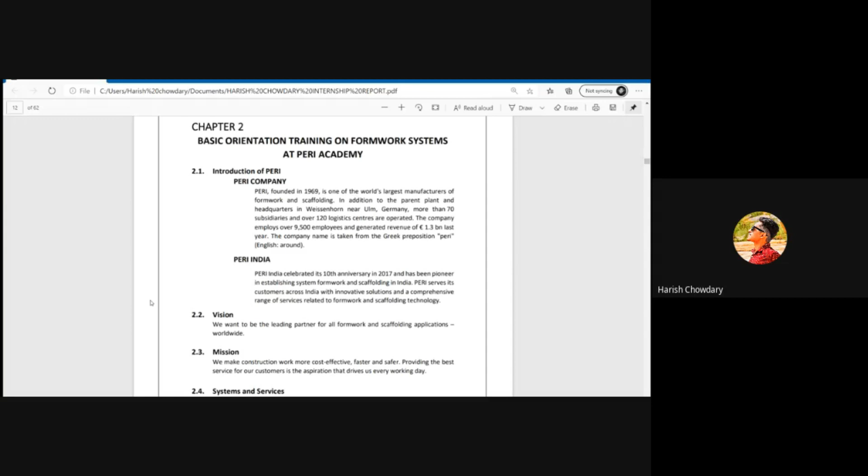Peri India celebrated its 10th anniversary in 2017 and has been pioneer in establishing system formwork and scaffolding in India. Their vision is to be the leading partner for all formwork and scaffolding applications worldwide.

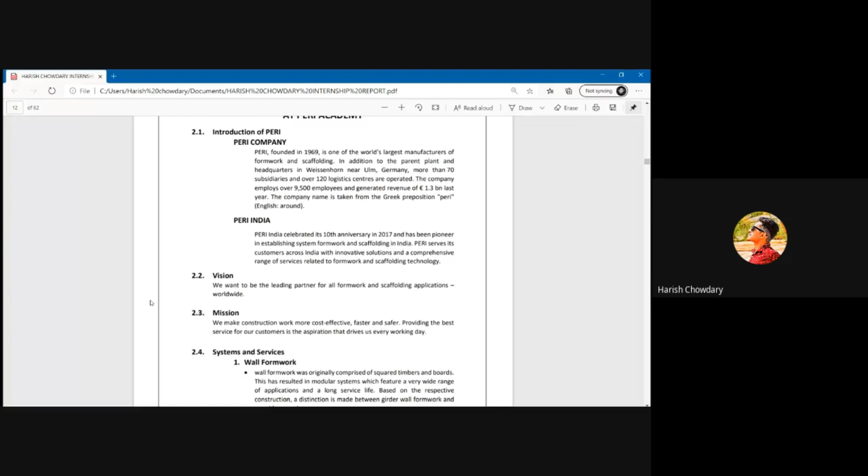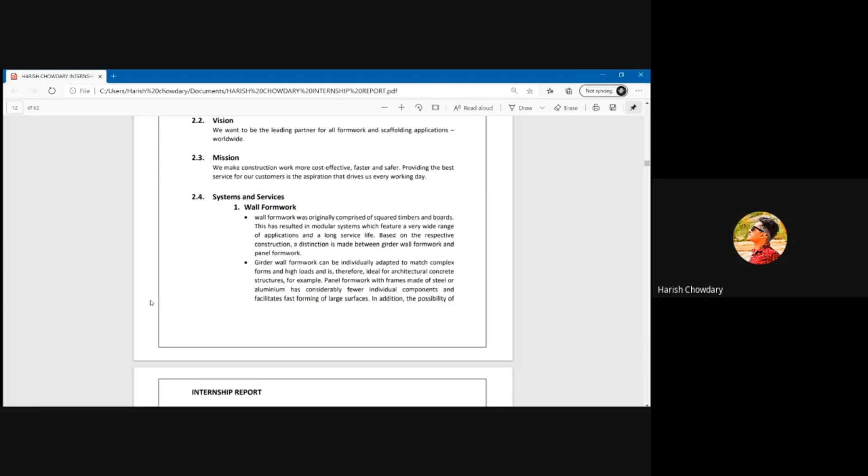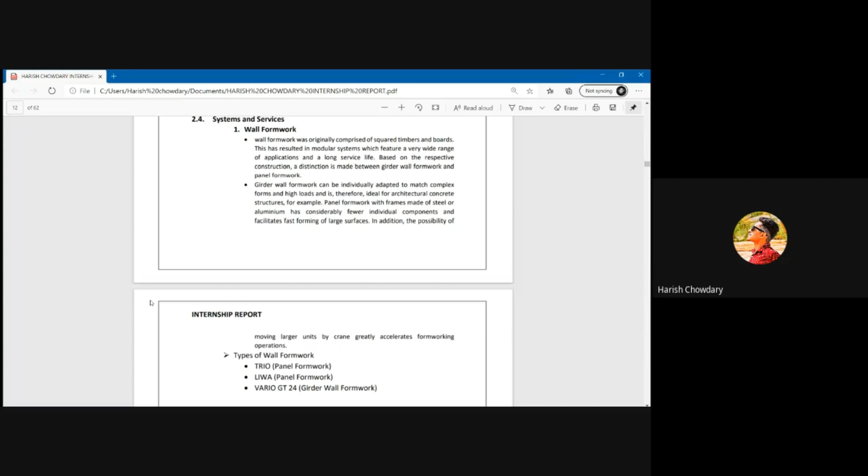Their mission is to make construction work more cost effective, faster and safer. Peri provides systems and services in formwork, scaffoldings, and many services. But in Peri India, they mainly focus on wall formwork and slab formwork.

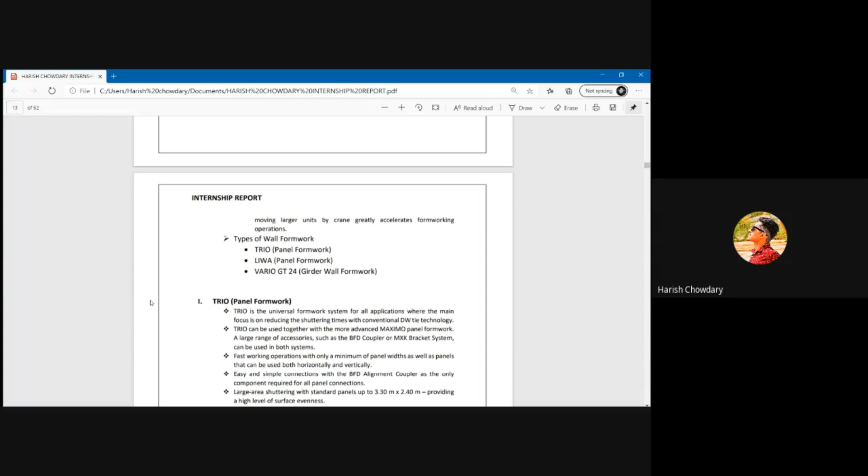In wall formwork, there are three types: Trio, which is a panel formwork; LIWA, which is also a panel formwork; and Vario GT24, which is girder wall formwork.

Firstly, we will talk about Trio panel formwork. Trio is the universal formwork system for all applications where the main focus is on reducing shuttering times with conventional DW tie technology.

The fast working operations with only a minimum of panel width, panels can be used both horizontally and vertically. Trio panel formwork has easy and simple connections with BFD alignment coupler, and can be used for large area shuttering with standard panels up to 3.3 meter by 2.4 meter, providing a high level of surface evenness.

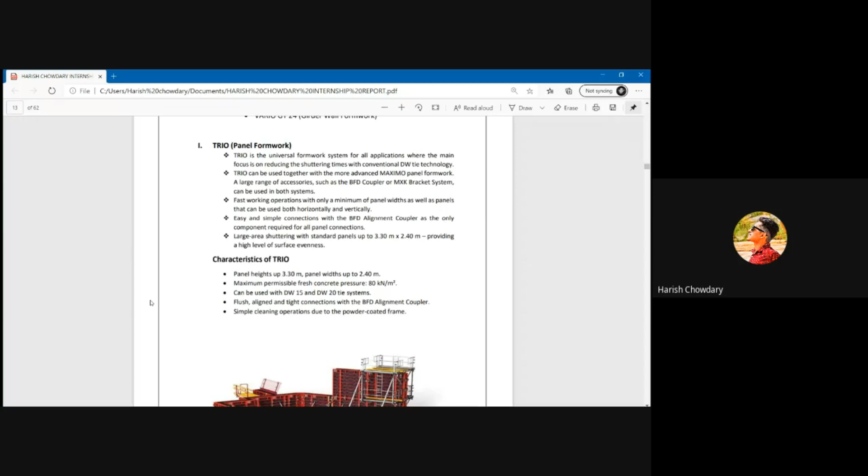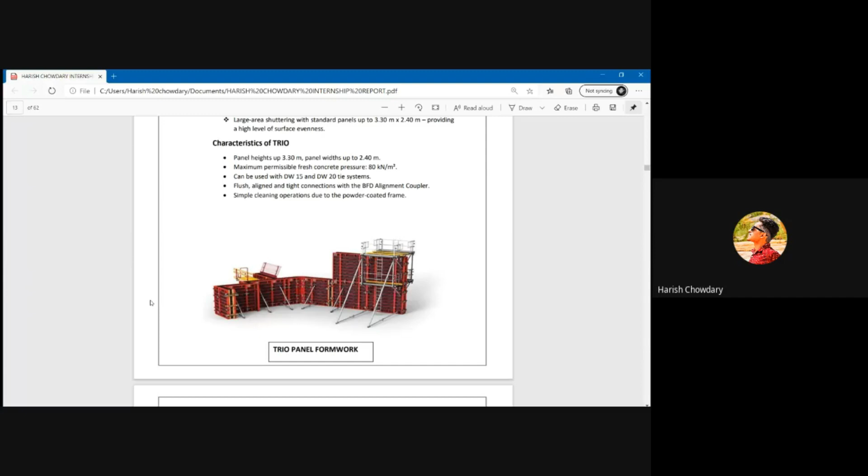Characteristics of Trio are its panel heights up to 3.3 meter and width up to 2.4 meter. It can carry a fresh concrete pressure of up to 80 kilonewton per meter square. They can be used with DW15 and DW20 tie systems.

As you can see, this is a Trio panel formwork which is useful for walls, and it also provides a safe working platform for laborers to pour concrete on standing it.

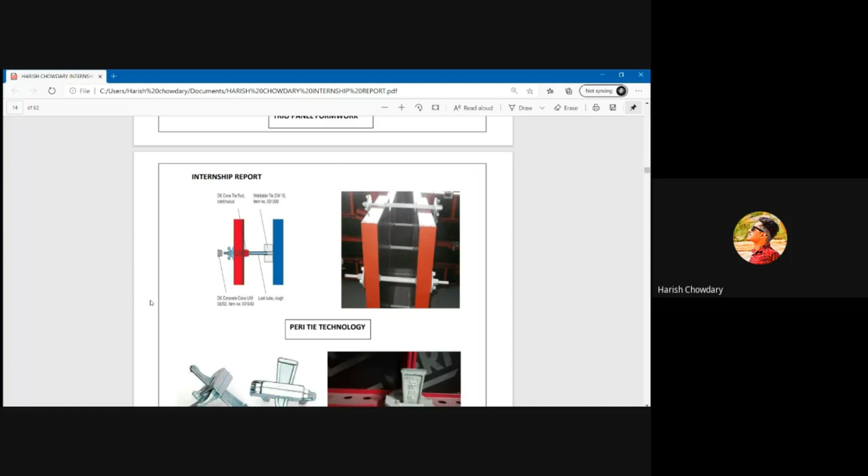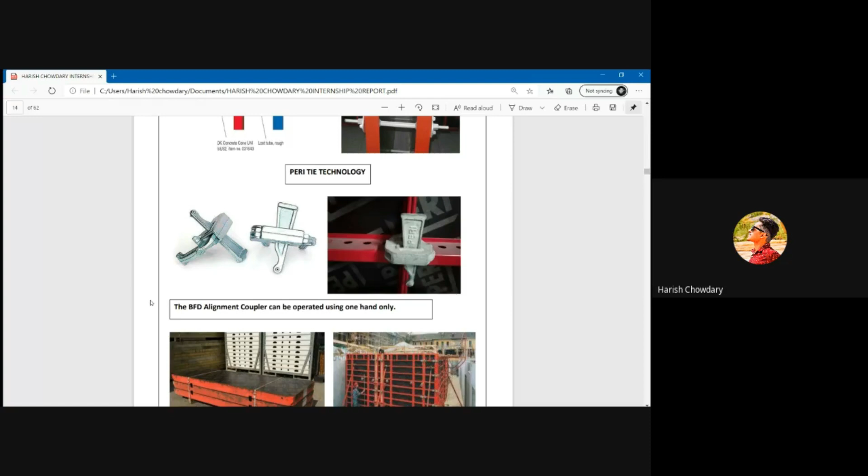This is the Peri-tie technology used to hold the panels tightly for the formwork. This is the BFD alignment coupler, which can be operated using only one hand. These are the panels which vary from size 3.3 meter to 2.4 meter.

The next formwork is LIWA panel formwork. LIWA is the lightest Peri steel panel formwork and deliberately dispenses with more elaborate equipment. This system has very few different frame elements and as every standard panel. It is also a multi-purpose panel which can be used for both columns and wall formworks.

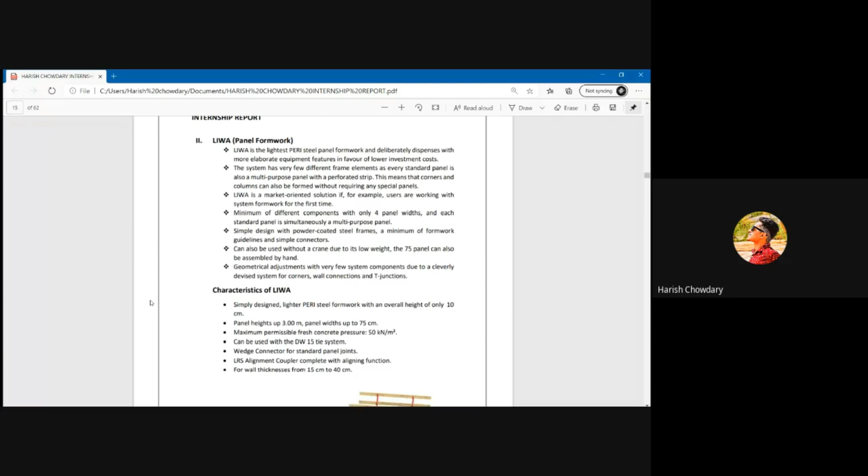LIWA is a market-oriented solution. It can be used with those who don't have any experience using it. Minimum of different components with only 4 panel widths, and each standard panel is simultaneously a multi-purpose panel. Simple design with powder coated steel frames, a minimum of formwork guidelines, and simple connectors.

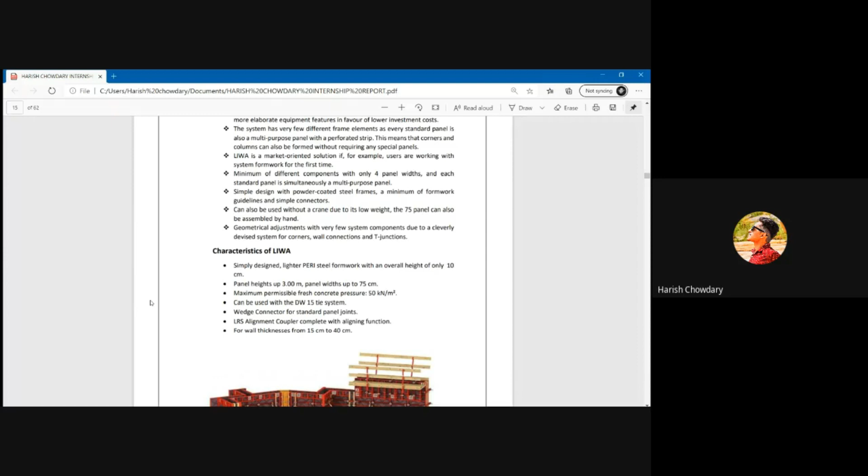Characteristics of LIWA: it is simply designed and a very light formwork with an overall height of only 10 centimeter. Its panel heights are up to 3 meter and width up to 75 centimeter, and it can carry a maximum permissible fresh concrete pressure of 50 kilonewton per meter square. It is also used with a DW 15 tie system.

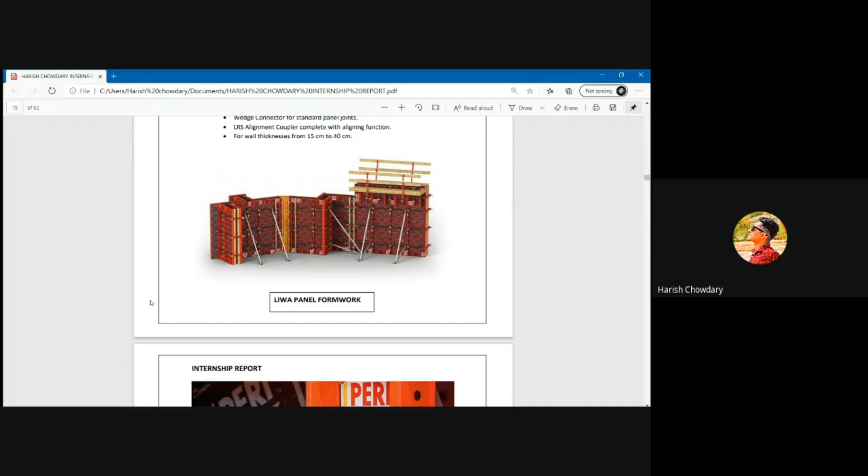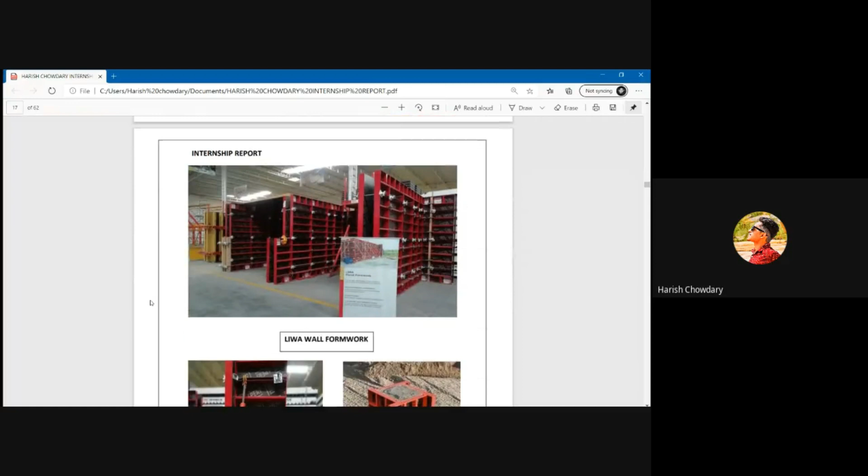As you can see, this is the LIWA panel formwork, a fully operated system with a safe platform for laborers to work. This is the tie technology used in this one. This is a multi-purpose formwork which can also be used for columns and also for walls.

And the third type is Vario GT24. With Vario GT24, the arrangement of individual system components can be freely selected. As a result, the system can be flexibly adapted to accommodate both geometries and requirements.

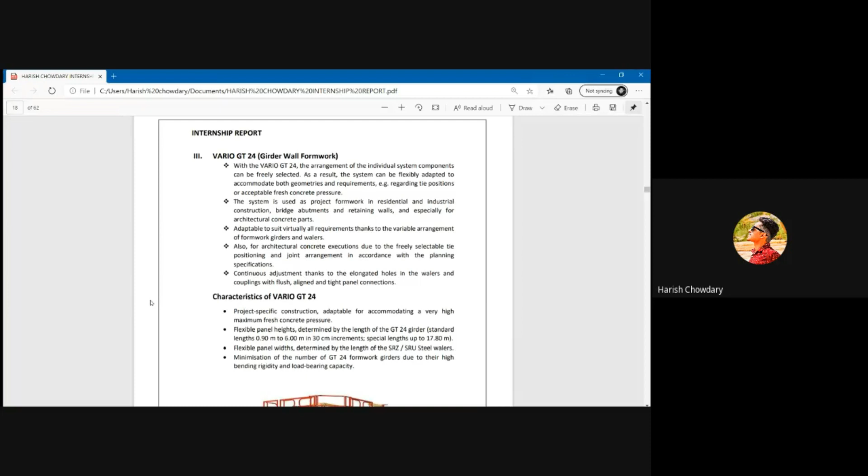The system is used as project formwork in residential and industrial construction, bridge abutments, and retaining walls, and especially for architectural concrete parts. It is adaptable to suit virtually all requirements thanks to variable arrangement of formwork girders and walers, continuous adjustments to the elongated holes in walers, and coupling with flush, aligned, and tight panel connections.

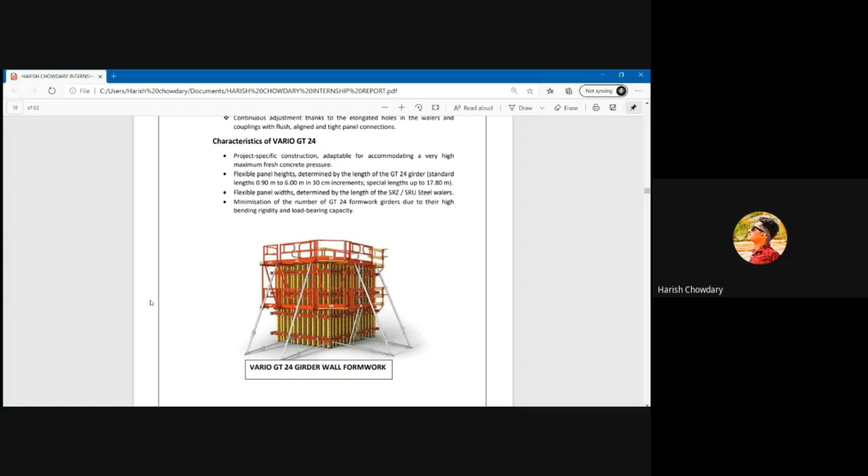Its characteristics are project-specific construction, adaptable for accommodating a very high maximum fresh concrete pressure. It has a flexible panel width determined by length of SRZ or SRU steel walers. Minimization of number of GT24 formwork girders due to their high bending rigidity and load-bearing capacity.

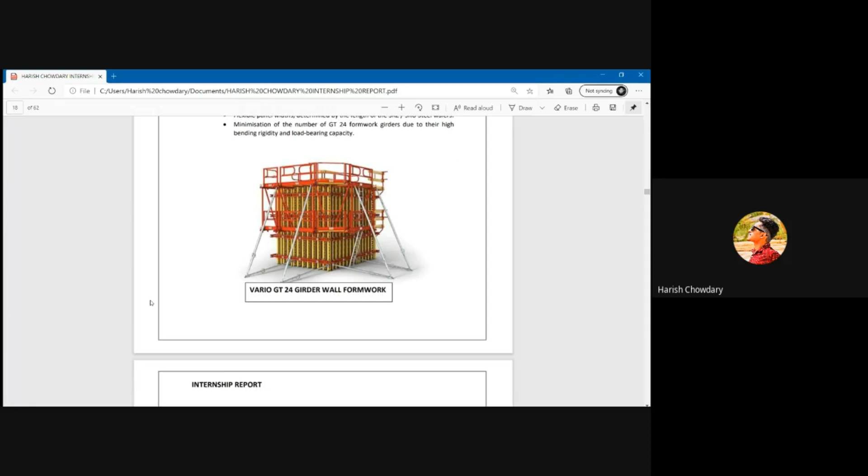This is a Vario GT24 girder wall formwork system. It can be used for curved and inclined walls also.

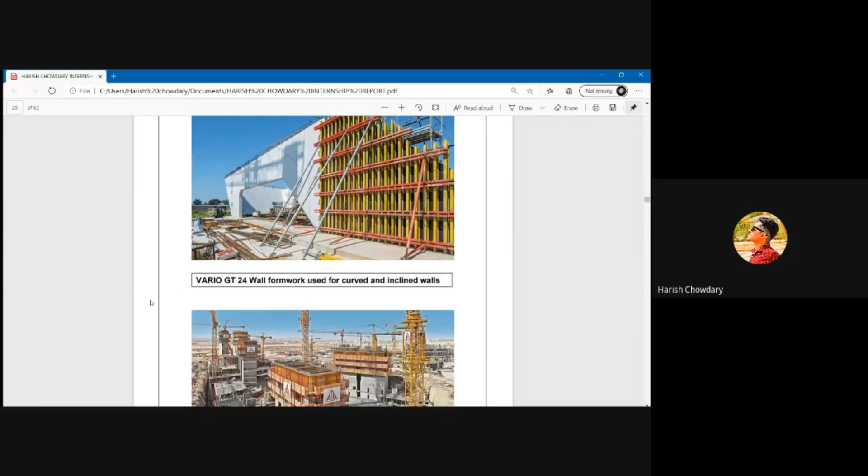And the second service they provide is the slab formwork. The types of slab formwork are Skydeck, panelized slab formwork, Gridflex grid element slab formwork, Multiflex girder slab formwork.

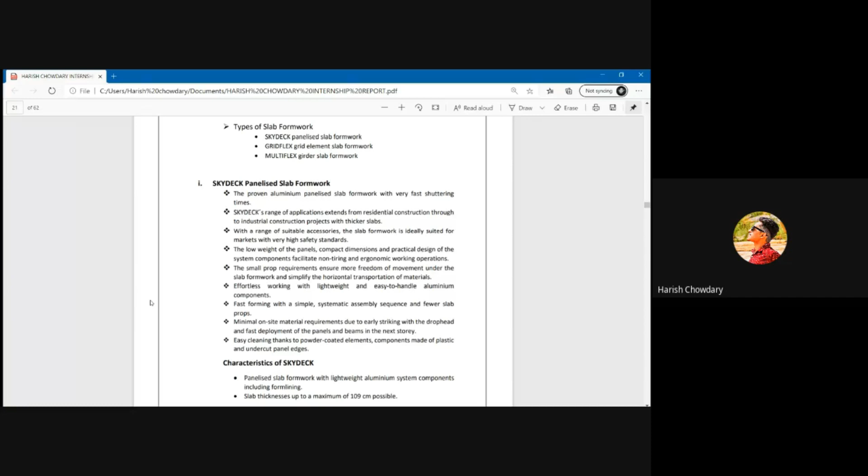Skydeck is the proven aluminum panelized slab formwork with very fast shuttering. The range of applications extends from residential construction to industrial construction. With a range of suitable accessories, the slab formwork is ideally suited for markets with very high safety standards.

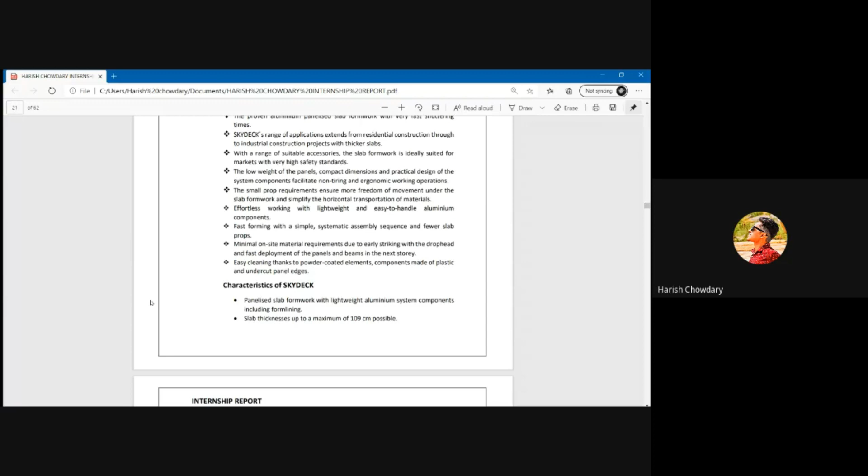The small prop requirements ensure more freedom of movement under the slab formwork and simplify the horizontal transportation of materials. Effortless working with lightweight and easy to handle aluminum components, fast forming with simple systematic assembly sequence and fewer slab props. It is easy cleaning thanks to powder coated components made of plastic and undercut panels. Characteristics of Skydeck.

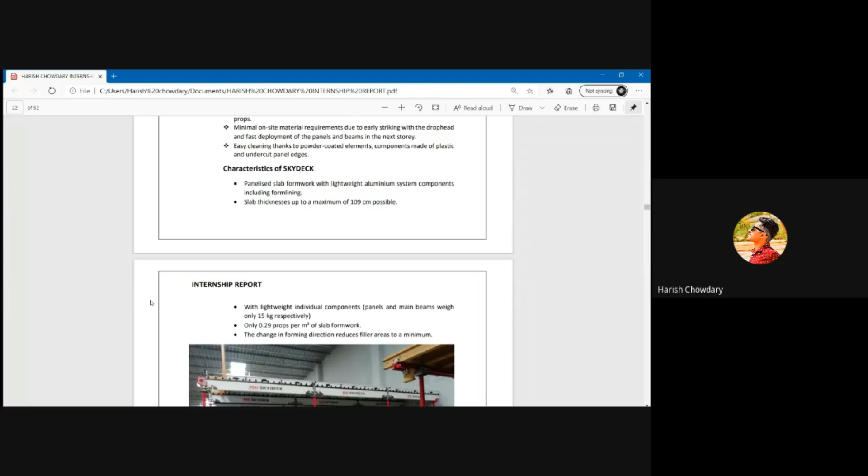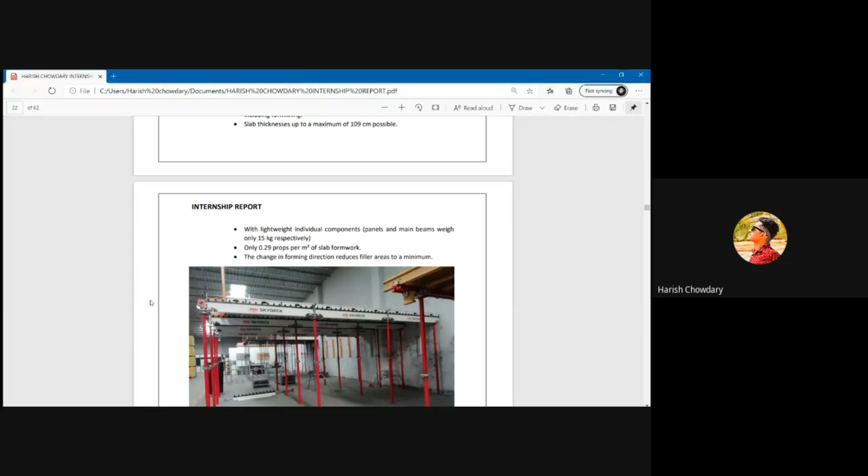The panel is a very lightweight aluminum system component including form lining. The slab thickness can be up to a maximum of 109 centimeters. It is lightweight with individual components - panels and main beams only weigh 15 kg respectively, which can be used manually. Only 0.29 props per meter square of slab formwork.

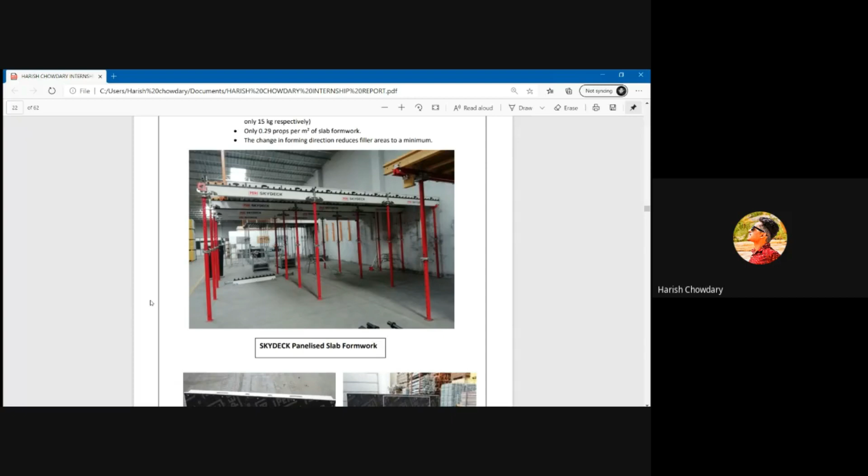The change in forming direction reduces filler areas to a minimum. As it requires only 0.29 props, we can easily access and move any materials under the slab formwork. These are the panels of various sizes.

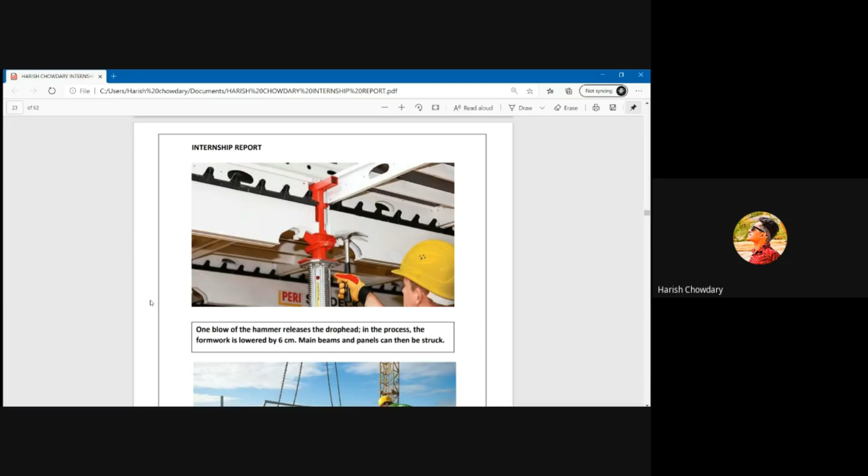It can be used, and in one blow of a hammer it releases the drop head in process. The formwork is lowered by 6 centimeters and main beams and panels can be struck.

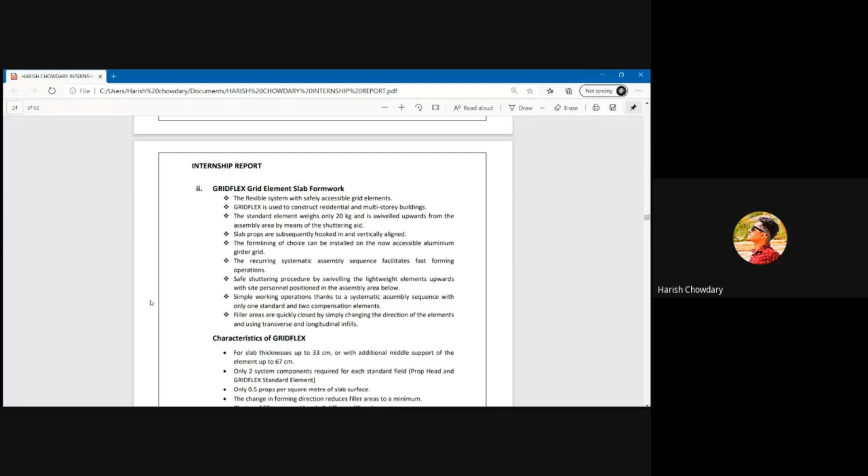The second slab formwork is Gridflex, the flexible system with safely accessible grid elements. Gridflex is used to construct residential and multi-story buildings. Slab props are subsequently hooked in and vertically aligned. The form lining of choice can be installed on the now accessible aluminum girder grid.

It is a safe shuttering procedure by swiveling the lightweight elements upwards with site personnel positioned in the assembly area below. Filler areas are quickly closed by simply changing the direction of the elements and using transverse and longitudinal infills.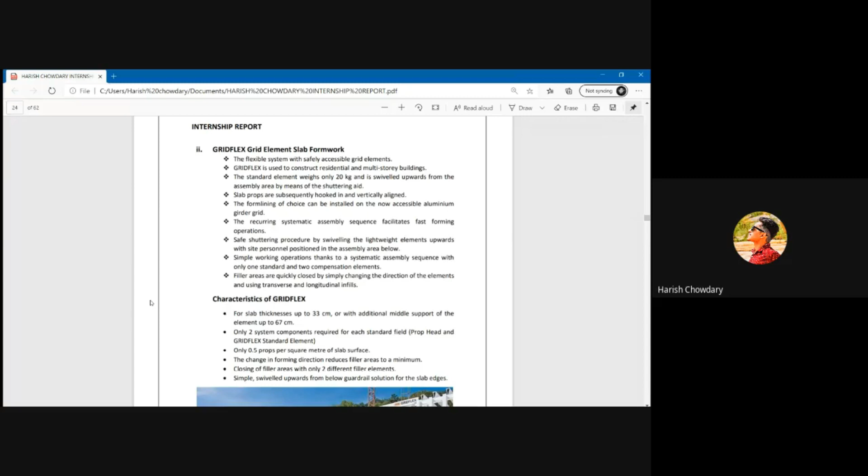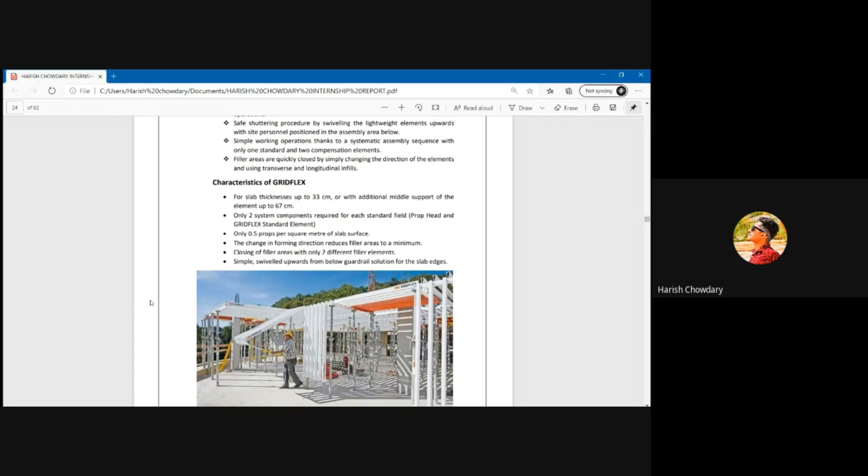Characteristics of Gridflex: slab thickness up to 33 centimeters, or with additional middle support of the element up to 67 centimeters. Only two system components are required for each standard field - prop head and Gridflex standard element. This requires only 0.5 props per square meter of slab surface, which also enables us to move freely below the slab formwork.

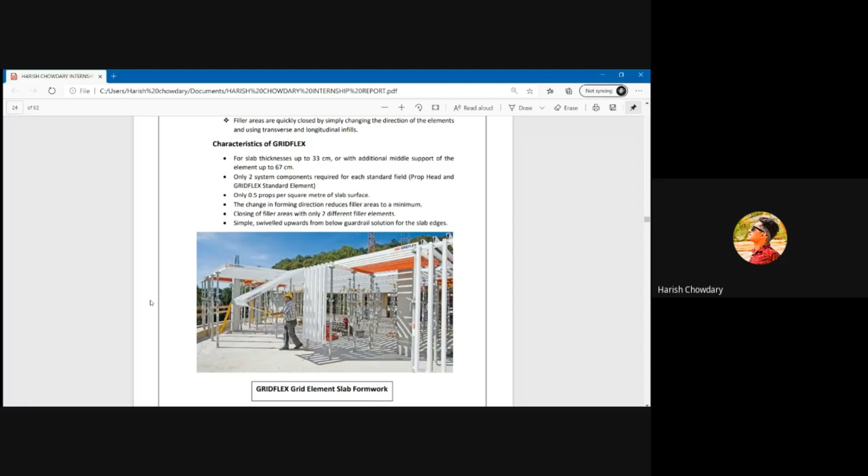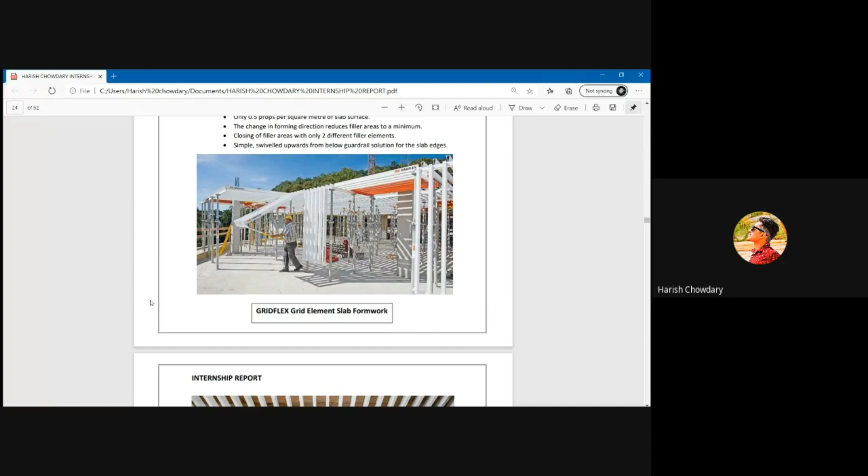The change in forming direction reduces filler areas to a minimum. Simple swivel upwards from below provides a guardrail solution for the slab edges. This can be erected with the help of only two workers for the whole project. Different coating colors indicate the function of slab elements.

The third slab formwork is Multiflex Girder, the flexible system for all ground plans and slab thicknesses. This can go up to 1 meter. The main components of Multiflex are VT20 or GT24 formwork girders as the main and cross beams; their position and spacing, as well as the form lining, can be freely selected.

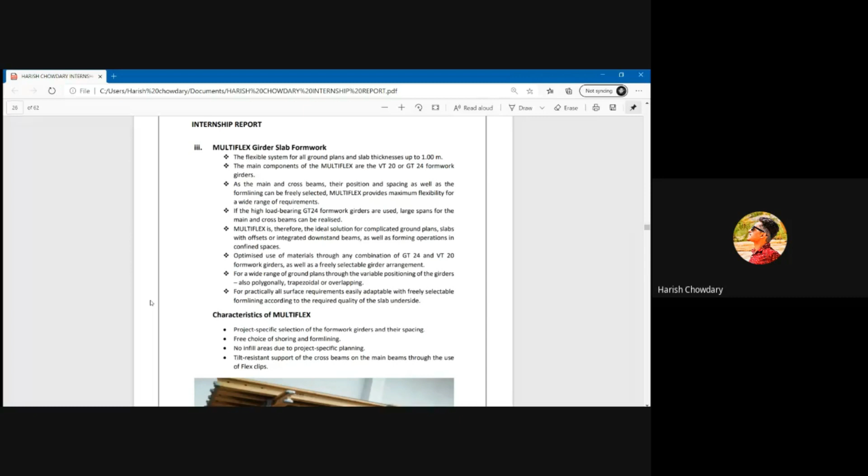Multiflex provides maximum flexibility for a wide range of requirements. It is the ideal solution for complicated ground plans, slabs with offsets or integrated downstand beams, as well as forming operations in confined spaces - for a wide range of ground plans, through the variable positioning of the girders, also polygonally, trapezoidal, or overlapping.

The characteristics of Multiflex are project-specific selection of the formwork girders and their spacing. These girders can be spaced very closely if the fresh concrete pressure is more, and can be spaced far apart if the pressure is less. Free choice of shoring and form lining, with tilt-resistant support of the cross beams on the main beams through the use of flex clips.

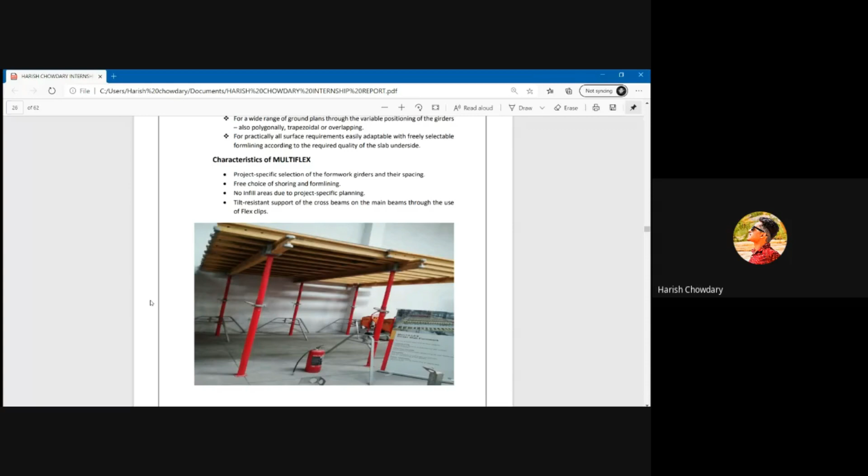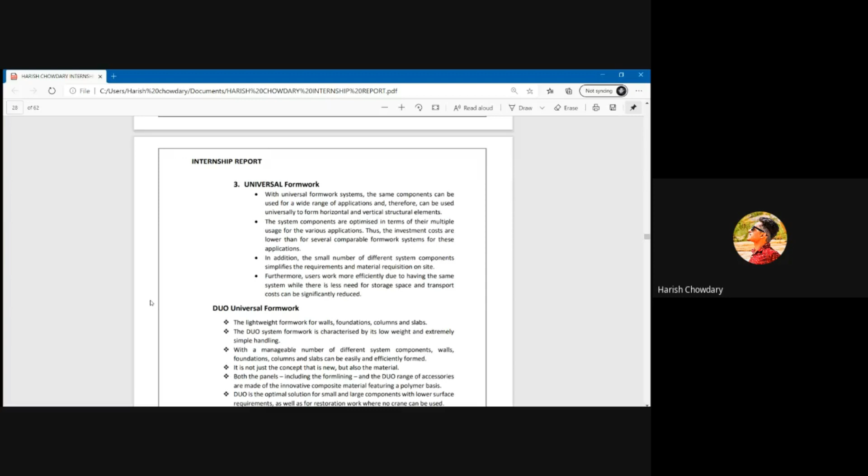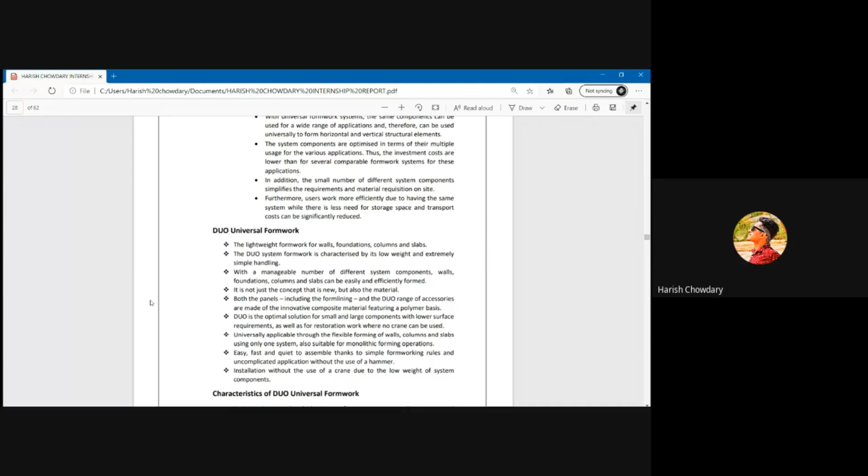So these were the three types of slab formwork, and one more formwork they provide is the universal formwork. This Duo universal formwork is lightweight formwork for walls, foundations, columns, and slabs - a multi-purpose formwork which can be used for all these purposes. The Duo system formwork is characterized by its low weight and extremely simple handling.

With a manageable number of different system components, walls, foundations, columns, and slabs can be easily and efficiently formed. Duo is the optimal solution for small and large components with lower surface requirements, as well as for restoration work where no crane can be used.

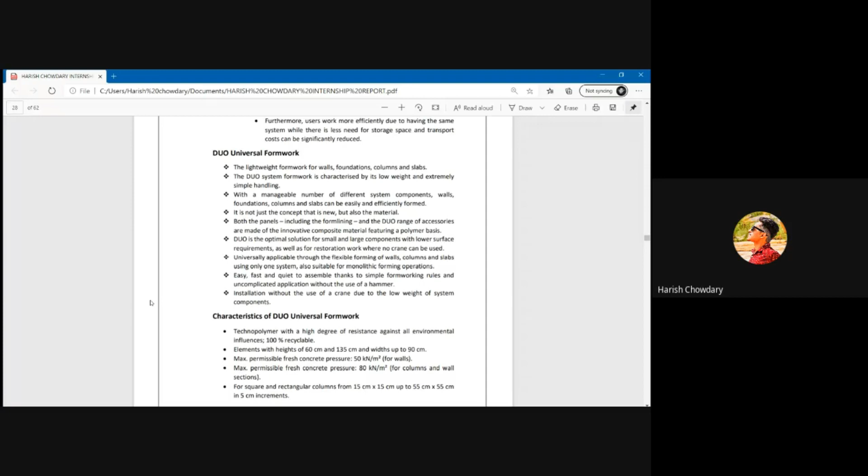This can be easy, fast, and quiet to assemble thanks to the simple formwork rules and uncomplicated application without the use of a hammer. Installation without the use of a crane is possible due to the low weight of system components.

The characteristics of Duo universal formwork: these are made up of technopolymer with a high degree of resistance against all environmental influences. This is a 100% recyclable element with heights up to 60 centimeters and 135 centimeters, and width up to 90 centimeters. Maximum permissible fresh concrete pressure is up to 50 kilonewton per square meter for walls, and maximum fresh concrete pressure of 80 kilonewton per square meter for columns and wall sections.

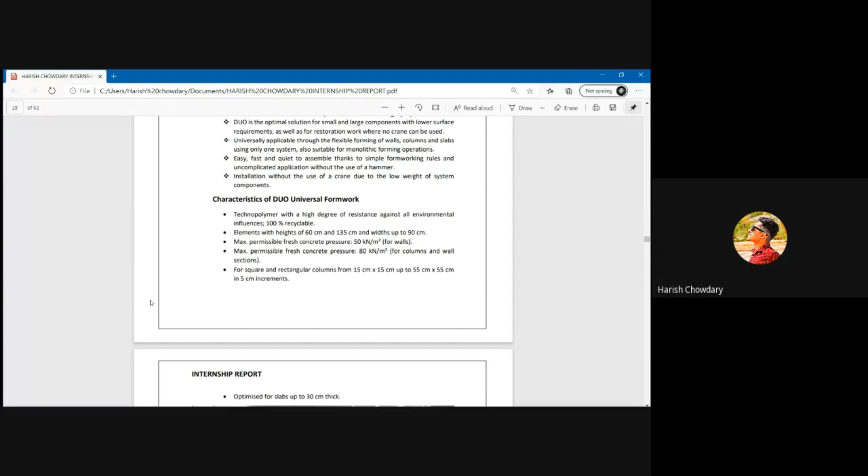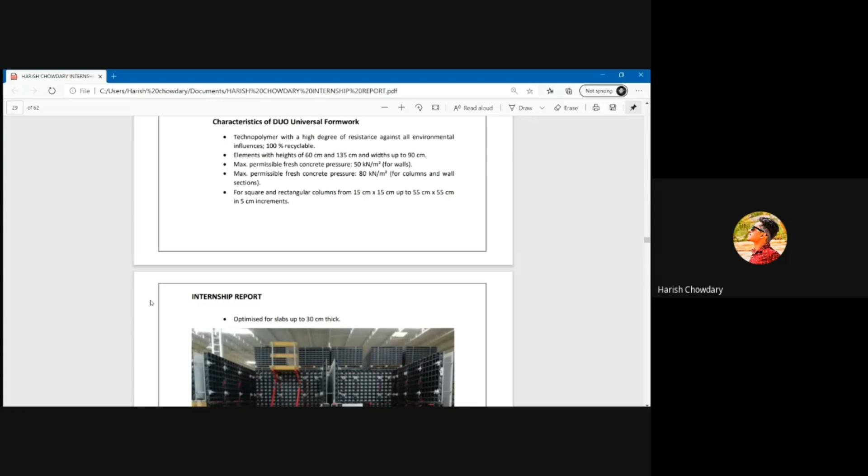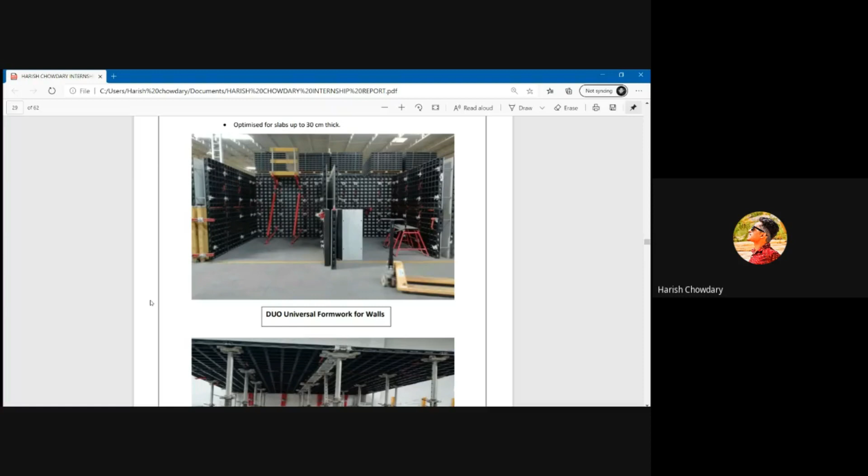For square and rectangular columns from 15 centimeters by 15 centimeters up to 55 centimeters by 55 centimeters in 5 centimeter increments can be constructed using this formwork. This is the Duo universal formwork for walls, and it can also be used for building the lift lobby and stair work.

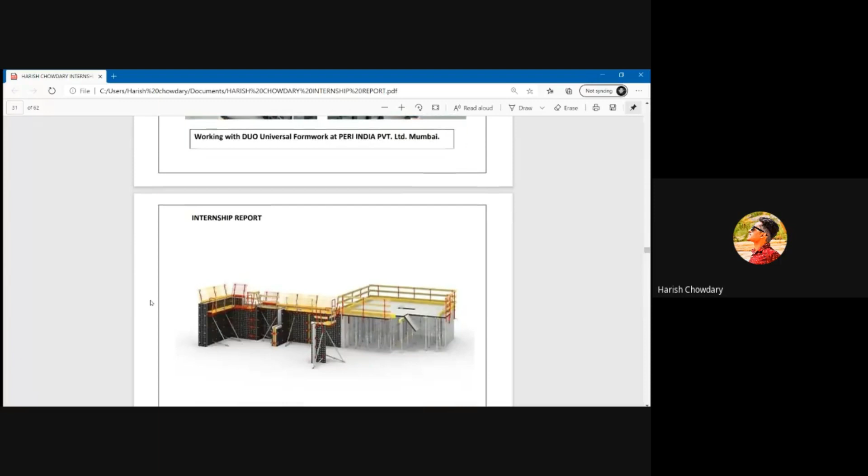So this was it about Peri, and I would like to share my experience working with Peri.

As Ashok sir told, this was in Mumbai, and we were afraid - firstly, we were afraid to go far away from Bangalore as we hadn't gone earlier. But with the help of Ashok sir and our beloved HOD sir, we were able to go to Peri, an international company which provided us 2-day orientation training, which was very successful, and we had a very good session over there. Then we were taken a test and provided with a certificate for completing the 2-day basic orientation training on formwork systems at Peri Academy in India.